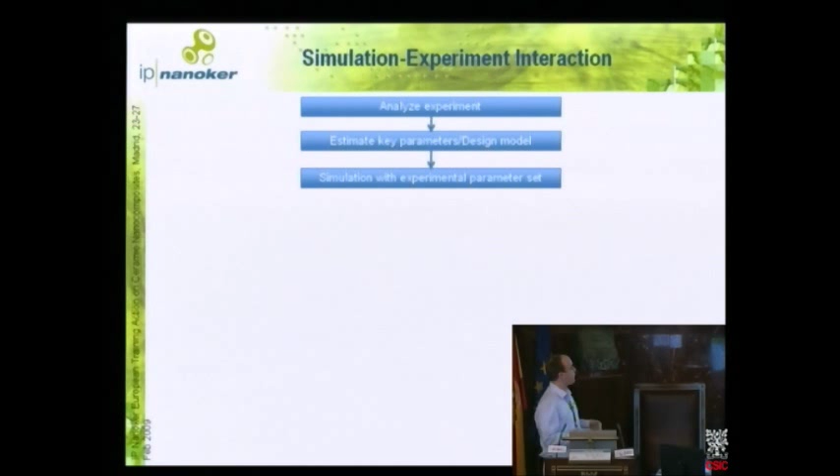So we look at the experiment, we try to get out what are the key parameters, and how can we formulate some sort of mathematical model taking these parameters and predicting what we're interested in as a property. Then we run a simulation with this set of experimental parameters. We compare it to the experiment and we say, does it actually reproduce our experiment or not?

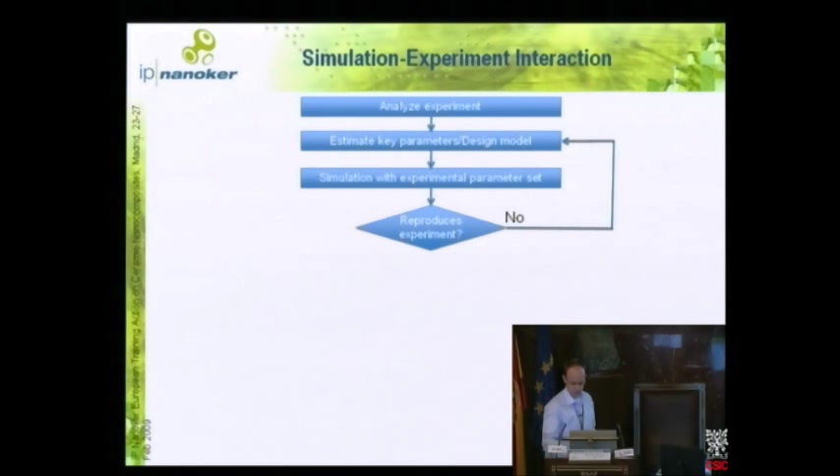If not, then okay, go back to start. We did something terribly wrong with our parameters or the model. Then we reevaluate this and we try to improve the model. If yes, the question is, are we now confident with the model? Maybe one successful attempt is not quite enough. So we do this a couple of times until we say, okay, now we believe in our model, and we are at this stage finished with what I would call the model development.

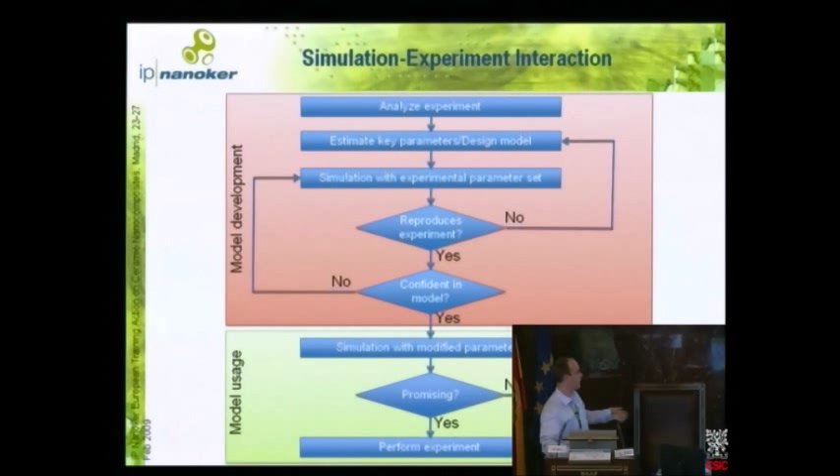Once we have that, we can then start to use the model, which is the more interesting part, probably, where we just simulate with a modified set of parameters with respect to here, and we just see, is it interesting? If no, then okay, we change the parameters. If yes, then we actually do the experiment, and so on.

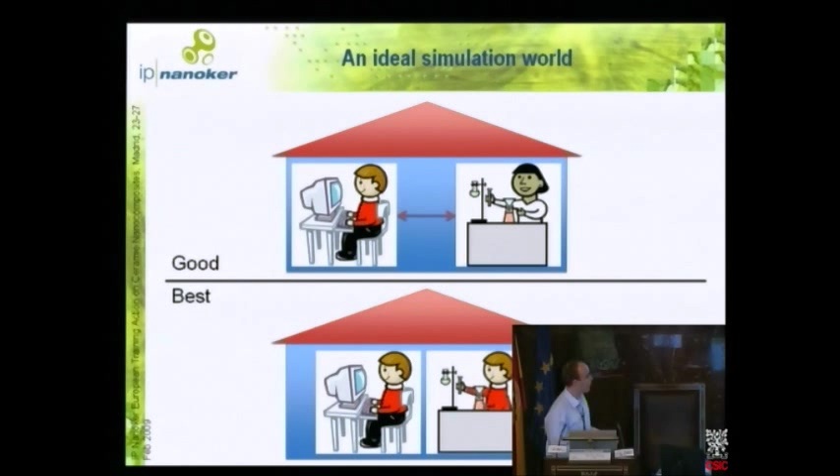Now, just to say, in an ideal world, there has to be the experimentalist and the modeler, and ideally they're in the same building, they work very closely together. The modeler tells the experimentalist, hey, I've done this, I need this type of parameters, can you do the experiment for me and I can validate? Even better if it is the same guy doing both, because then he doesn't have to talk, he just does both things. However, it is extremely seldom to find persons who can actually perform both things at the same time. Okay, that's the ideal world.

Now to the real world. Most often, they are not in the same building, they are quite far apart, and communication is somewhat interrupted. Now, even worse, this guy is just sitting all by himself in his house. He doesn't have an experimentalist to talk with, and this is something that happens way too often and is actually quite scary, I think.

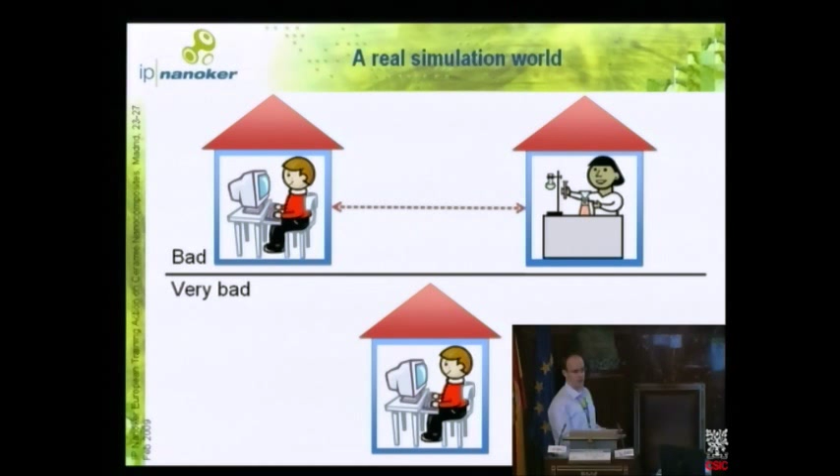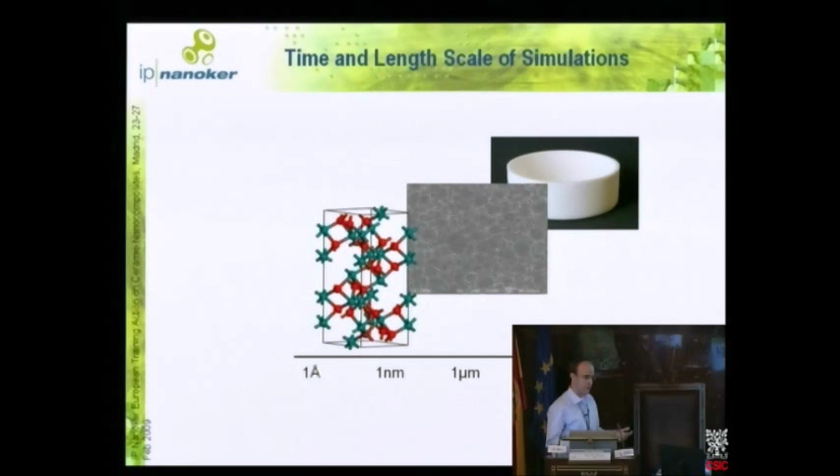The second thing I want to show is what type of simulation approaches we have and where we can maybe use them for ceramics. So if we start very macroscopic with a piece of ceramic, we can really treat this as a continuum. This is just a material and we don't care what is inside. If we zoom in further, we get a microstructure. If we zoom in further still, we get the atomic structure. I don't have a picture here of the electronic structure, but we can zoom in further still.

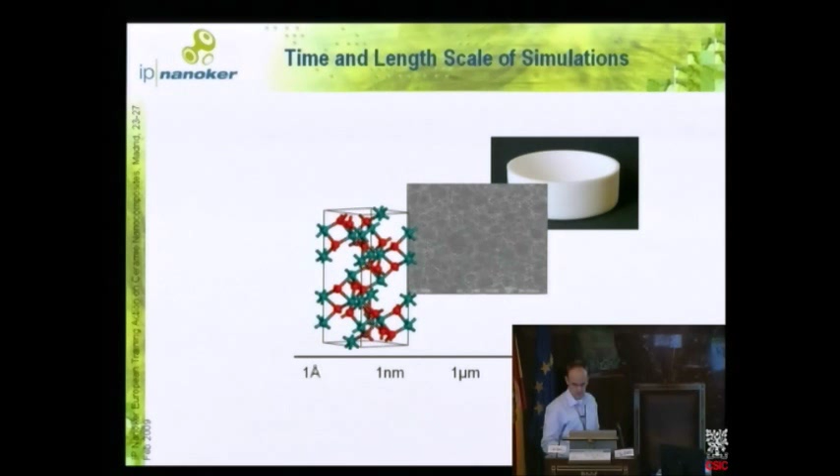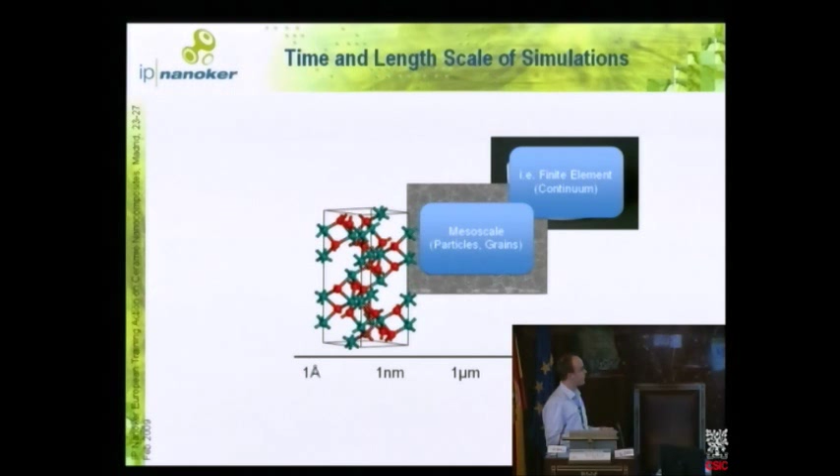So we see that we have quite a long distribution along a length scale, going from an angstrom to the meter, so 10 orders of magnitude, that we can cover with different simulation approaches. To do macroscopic modeling, we use something like finite element methods, etc., where we can go to the really large length scales. Here we would use what is known as mesoscale modeling methods, where we treat particles or grains as the primary building blocks. And we have molecular mechanics methods, where atoms are what we're dealing with.

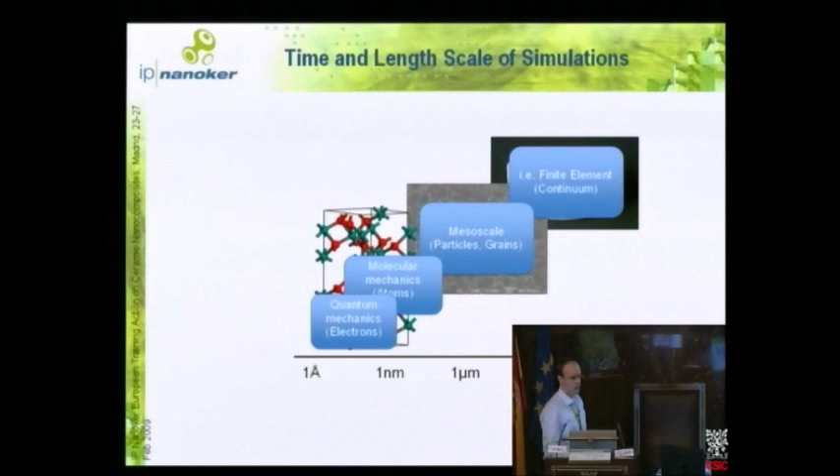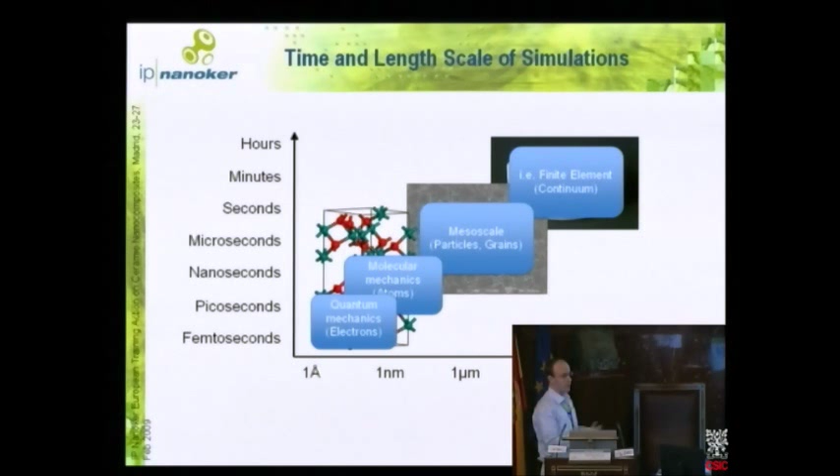And finally, we can do quantum mechanical methods, where we actually look at electrons and what they do in the material. All of these methods are also going to allow us to go to a very specific time scale. With the quantum mechanical methods, we can go up to a picosecond. It's not very long with respect to most material processes. Molecular mechanics allows us to go up to nano, sometimes microsecond range. It's still not very long. And the higher we go up in this scale, the longer we can actually run our simulations.

This shows that there is a big variety of methods, and we better choose the right one, because simulating a macroscopic piece of ceramic using quantum mechanics would probably take me 1,000,000 years, so not very interesting.

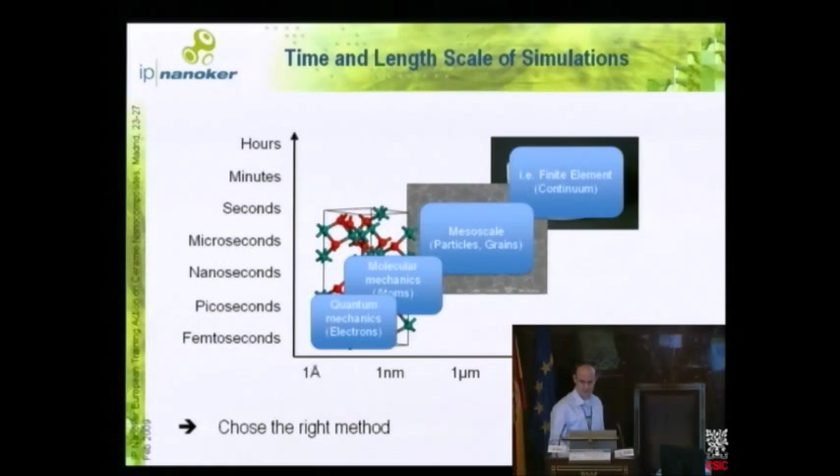In IP Nanoker, there has been quite a lot of research and simulation. We have started with the very big, so we have done finite element simulations for the case of SPS and for thermal and residual stress analysis in sprayed coatings. Then there were some fluid dynamic simulations for the spray processes, some thermokinetic modeling, which is more analytical modeling. We had particle interaction modeling, optical mean field models, so this is more the mesoscale. And finally, we had atomistic simulation. And the ones that are red here are what we're going to hear about later today.

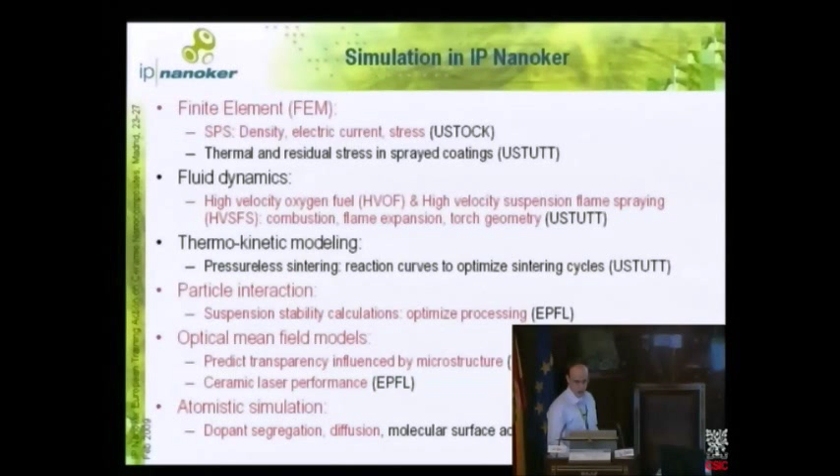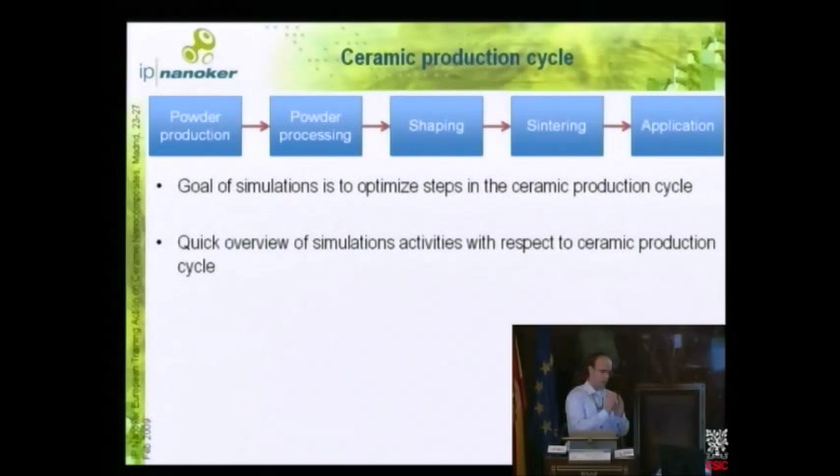What I'd like to do now is to actually position all of these methods with respect to a ceramic production cycle. Since the goal of this modeling is to actually make better ceramics, or to give us hints on how to do better ceramics in the laboratory, it is quite important to see, okay, where do we target our research?

The first one, segregation. Segregation, it's hard to pinpoint it exactly because it happens in the powder production if we put our dopant in at that stage. Also during processing, we can add dopant there, or then later it's going to act during sintering. Methods that we use to calculate segregation, and I'm going into more detail on that later, are empirical potential models where we just can evaluate the energies of different atomic configurations. So we have an arrangement of atoms, we see, okay, this one is more favorable than another one. We can therefore say where the dopant is going to be.

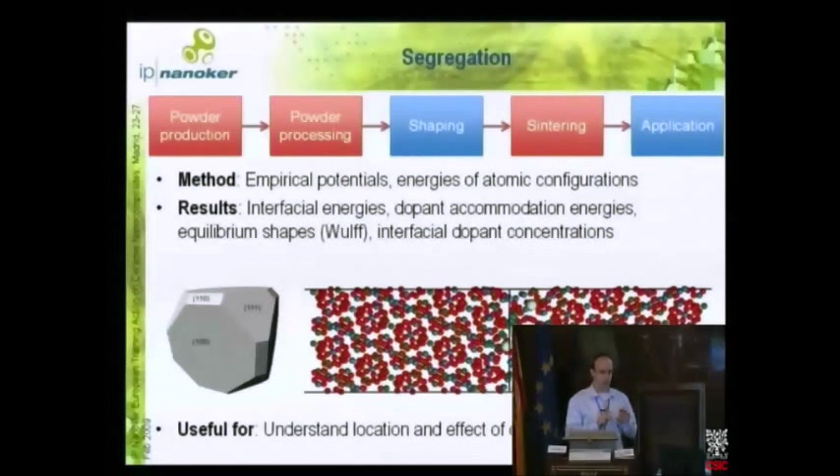We get interfacial energies, energies to put dopants into our material. We can get equilibrium shapes and concentration of dopants at the interface. This is quite useful to understand where the dopants are, what they do, and then have some clues for experiment on how to better use them.

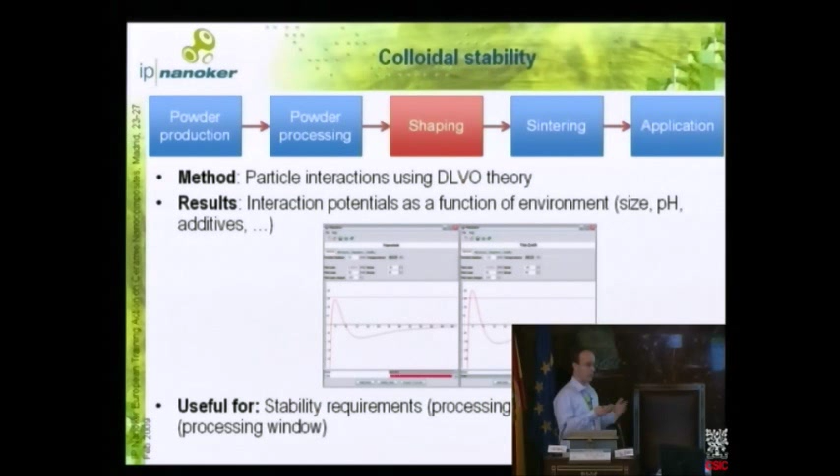Colloidal stability, I would probably put it here. One could argue it's also during powder production if you want to keep the stuff in suspension. We use the DLVO theory, we've seen it already mentioned this week, where interaction potentials between different particles are calculated as a function of the environment they're in. And Paul is going to go into more detail on that later. And we can predict stability requirements, so in other words, processing conditions we need, and the processing time that we have, so the time these suspensions are actually stable.

Thermal spraying is, for me, a shaping process. I'm not a specialist at all, so I hope I'm not stepping on anyone's toes here with my classification. Computational fluid dynamics are used to model here the combustion chamber, then the nozzle, the jet, and the deposition. And this is useful to actually optimize the geometry of these things and the conditions of the powder. So the particle size, is the stuff going to melt or not? And how is it going to be deposited on the substrate?

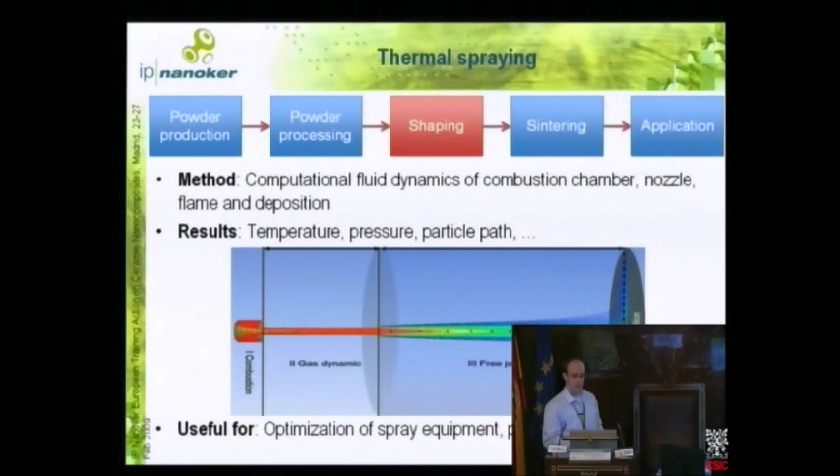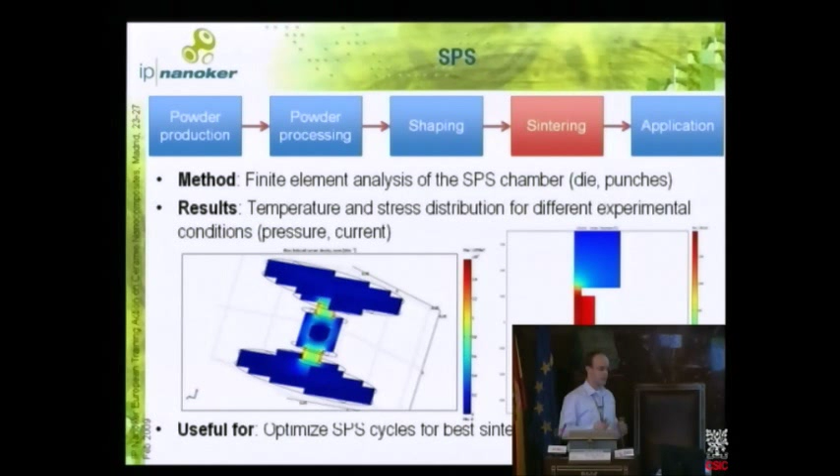Thermokinetic modeling has been done by Frank Kern in Stuttgart, where he took dilatometry results and fitted them to analytical reaction schemes to actually get out not what happens, but how to optimize two-stage sintering cycles. We're not going to hear about that, but if you're interested in this sort of modeling, then maybe go and talk to Frank. There's a poster outside.

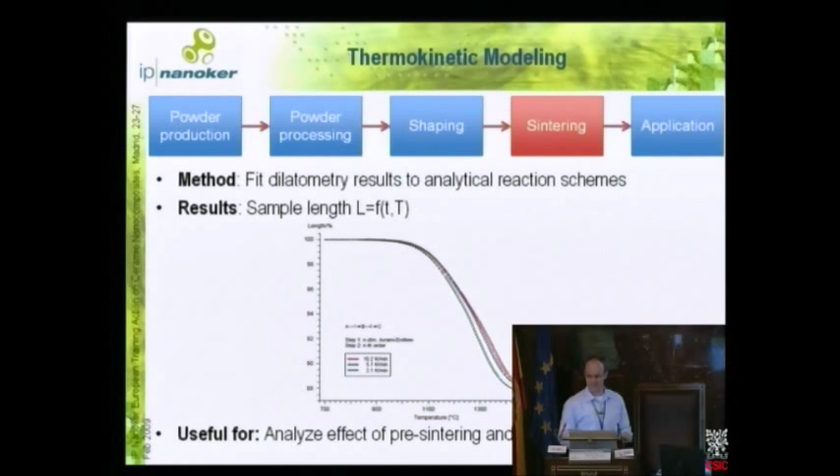For sintering as well, we've done some atomistic simulations, a combination of two methods, metadynamics and Monte Carlo methods, to calculate energy barriers for diffusion, then diffusion traces or trajectories, and finally diffusion coefficients. And this is useful if we want to understand actually how an atom gets from A to B, how long it is going to take, and maybe better understand what actually happens during sintering.

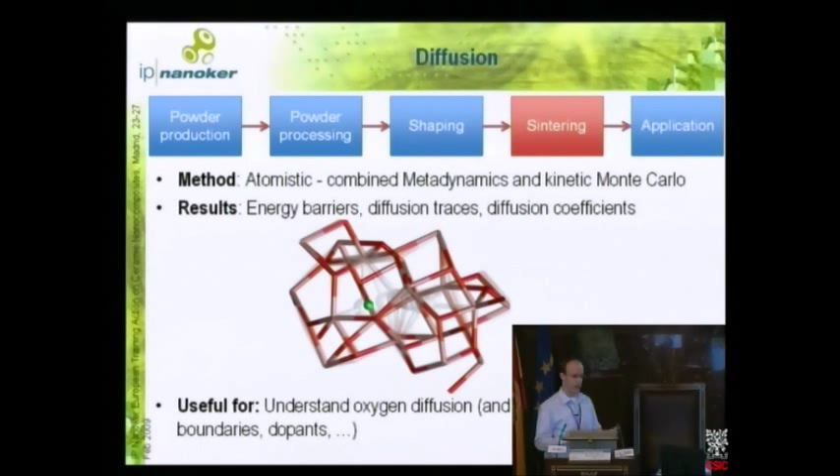On the applications, we had some applications of optical mean field models. Carlos Pecharromán explained a bit on that yesterday, where we tried to predict the transparency of a microstructure as a function of its size, its texture, maybe the porosity and second phase, and other possibilities we have seen, for example, the inclusion of phonon dispersion in the optical models. And this is really useful if you want to predict microstructure target values that we should get to in sintering. If we can say this grain size is going to give us the best transparency, then the experimentalist can, without too many different attempts, actually get to the right grain size.

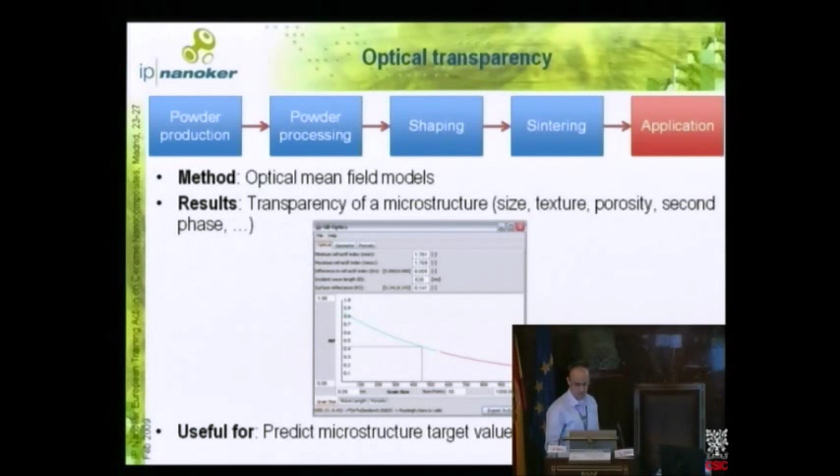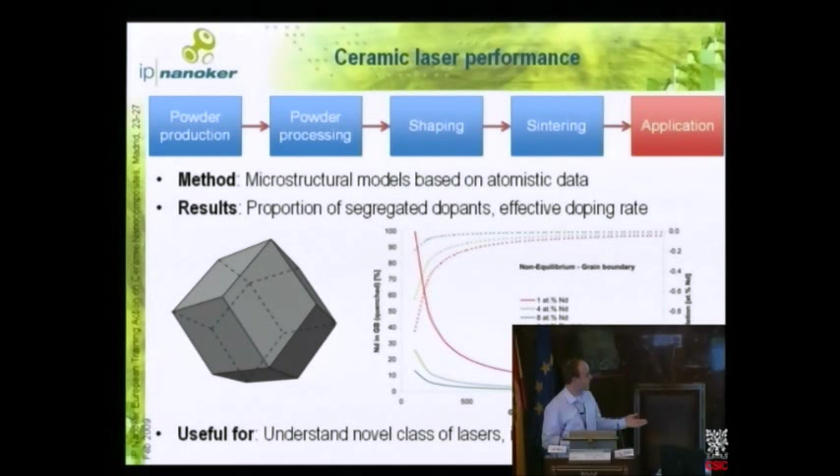What we have also done is to try to evaluate laser performance, and this is going to be the topic of my afternoon talk, based on dopant segregation. So we want to look at what proportion of dopants is segregated, what is actually the rate of dopants that sit in the grain, and based on that, actually get an understanding of this quite new class of ceramic lasers. I was at a laser ceramic conference, and I learned that these guys don't know at all what a ceramic is. They treat it as a single crystal, which is not quite true. So we actually want to understand this and see what are the possibilities we have with this kind of material and what are the issues we're going to run into in their development.